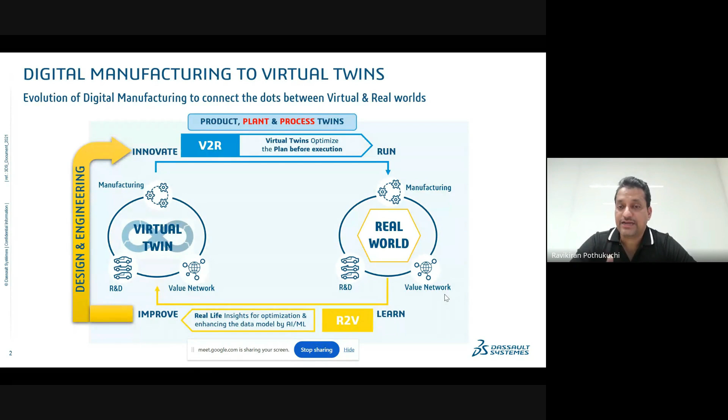Everyone knows it. You create a model, and that model starts learning from what's happening in the real world. That's artificial intelligence, right? You have a model, and that model is understanding from the real life insights, and it is becoming better and better. So this is the manufacturing world, and this closed looping is what we call it as the power of virtual twins enabled artificially intelligent engineering operations or industrial operations.

So in summary, the digital manufacturing has evolved to become artificially intelligent. And how did it become artificially intelligent? For anything to become artificially intelligent or AI ready, you should have a model first. You should have data first. Model is coming from virtual twins. Data is coming from real world operations. That data is plugged into virtual twin, and the virtual twin starts learning from it and starts becoming artificial intelligent. And thereby, what you're doing, you are creating new products, new plants, new processes that are much better than your earlier versions. This is the evolution of digital manufacturing.

And this is the future of digital manufacturing. And AI is not just limited to the software engineers and IT geeks. AI, please be ready. AI is knocking your doors, guys. It's knocking the doors of plants, shop floors, design houses, and all of that. And there is a lot more that I'm sure you're doing a lot of Googling. You'll figure out how AI is.

You can now click off a button or giving a prompt, you can design a car. You don't have to do all these flashy steps. You may wonder that it might be discouraging for a mechanical engineering graduate who is spending four years to design an IC engine. And here somebody is telling me that you just have to put a prompt with some text and some questions, and suddenly it creates an IC engine. Yes, that's going to be reality. And the reality is propelled by virtual twins.

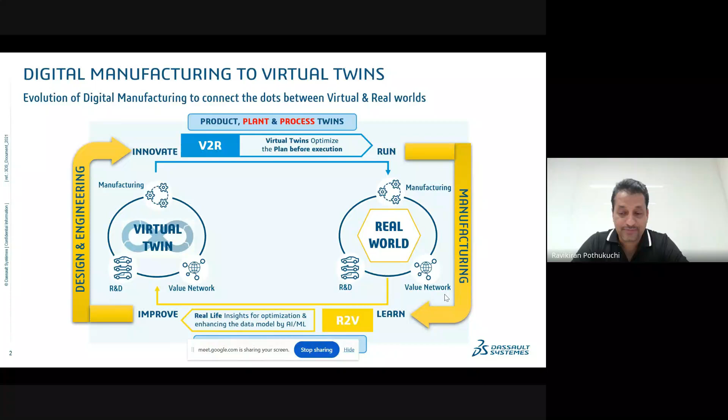And that's why I'm saying it's still future, but there is a lot of research that we are doing at Dassault Systèmes, and there are so many other companies that are investing a lot of money into their research and development to bring out this generative experiences or generative product design and product manufacturing capabilities into the technology. Okay, with that context, I'll having set the context about digital manufacturing and how digital manufacturing is evolving into virtual twins and how virtual twins are becoming the foundation of this AI of industrial operations, right?

I'll pause here so you internalize this message about how digital manufacturing is evolving into AI-driven industrial operations. Now I'll give you examples from both aerospace and shipbuilding industries, as requested. But here is where we may look at some traditional things first, since the future is still getting ready and I'm not entitled to share that yet—it's still confidential IP. I wish I could share that next year when we do the session. I'll share more about generative AI-driven design and AI-driven manufacturing capabilities. Now, coming back to how digital manufacturing is critical, how and why it's enabling these industries, especially the players in them.

Okay, I'll take a quick pause for you to internalize that message, and also a sip of coffee for me.

Now let's come to the aerospace industry. Ten years ago, people just knew there was an aircraft and you fly—nobody had much interest in aircraft except aerospace engineers. But today everybody's interested, for good and bad reasons. The good reason is that flying is always exhilarating; I remember my first journey at 20 years old, being on the clouds, experiencing that journey. It was good. But in the last 10 years there have been so many aircraft accidents, especially the Boeing 737 MAX, and that has garnered interest even from common people.

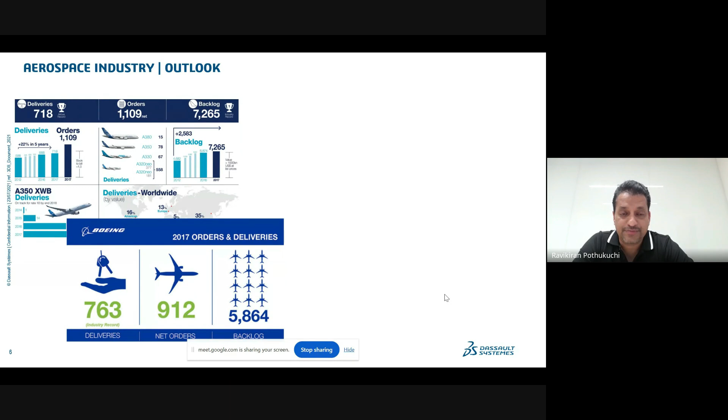And this is where digital manufacturing comes in handy. First, how can I produce more with what I have? That means I have only a few plants—can I produce more and more? If I'm producing 10 aircraft, can I make it 20 aircraft a year from that same line? So to do that, how do I modernize my existing facilities, which is very important because newer equipment brings better efficiencies?

Then the second part: because of these rush deliveries, there were quality issues, as we've seen with Boeing 737 MAX. So it's becoming even more paramount—regulatory demands on aeroplane companies have increased. It's important that non-conformances are reduced, and first-time-right is being looked at very keenly. That means shop floors and factories have to become more and more quality compliant.

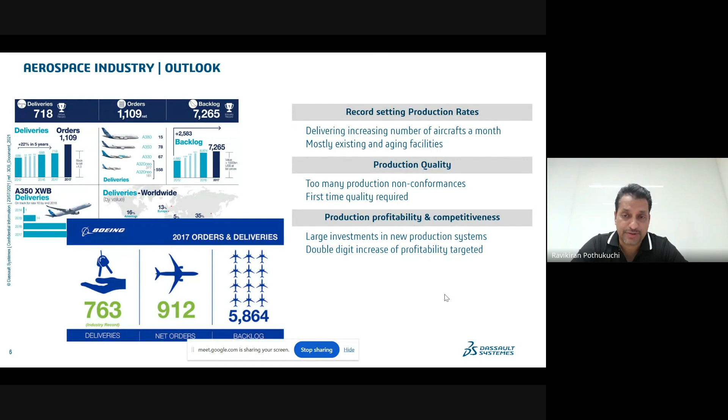And then there's production profitability and competitiveness. There are so many players coming into this space, and there's a lot of competition among them. So when there's competition, profitability reduces. And when profitability reduces, people tend to take shortcuts.

How can you maintain your profitability while being competitive? That means you have to adopt new methods, new materials. If I use a composite instead of regular sheet metal, my fuel efficiency will increase. With maybe one gallon of fuel, today I'm flying 1,000 or 10,000 kilometers, you may fly even more. So how do you bring new materials and new methods of manufacturing so that your operational costs are reduced? This is where profitability comes into picture.

It's not just about what is the cost of making it, it is also important what is the cost of operation. A lot of people tend to ignore that. That is where the competitiveness by introducing new systems, new materials, and new methods of manufacturing from the shop floor context becomes very important. And then the supply chain dependency.

Today, even in India, we have so many companies like Tata Advanced Systems, Tata Aerospace and Defense, Mahindra Aerospace, Godrej, all making components for global aircraft companies. For example, the Boeing 737 empennage is made in Hyderabad, and similarly the Sikorsky helicopter cabin is made in Hyderabad. So what do I mean by this? Although the assembly units are in the US and Europe, these components are distributed across the globe, some manufactured in India, some manufactured elsewhere.

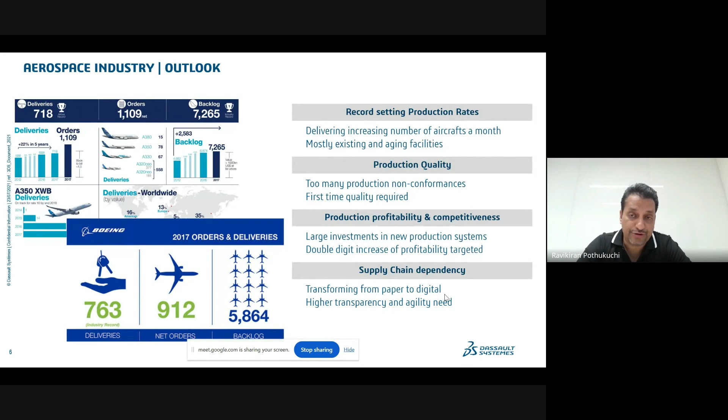Because of these factors, I have given you a business outlook, because it's very important. I know most of you are engineering graduates and you think technically, but it is important to understand why there is a need for certain technology. Every technology is nothing but an application of science, and it exists to address a certain business problem. So the business context is always important. I just spent some time giving you this business context.

So how can they produce more and more with the same capacity? That means they have to produce more per hour. And how can they do it? Can we have a flexible production system? A flexible production system is a production system which can be tweaked based on the demands and the product variants and configurations.

Production quality, as I said, ensuring production quality is paramount in aerospace engineering. There are so many ways and means to track quality during production and assembly. Today, there are devices on the shop floor that can monitor the torque applied while screwing a bolt or a nut, and even those parameters can be captured automatically. There's even auto torque which screws it, and you get the parameter of whether it's within range or not. There are many ways of carrying out assembly, riveting, bolting, and welding activities, automatically captured by these IoT systems to tell you whether they're within range or not.

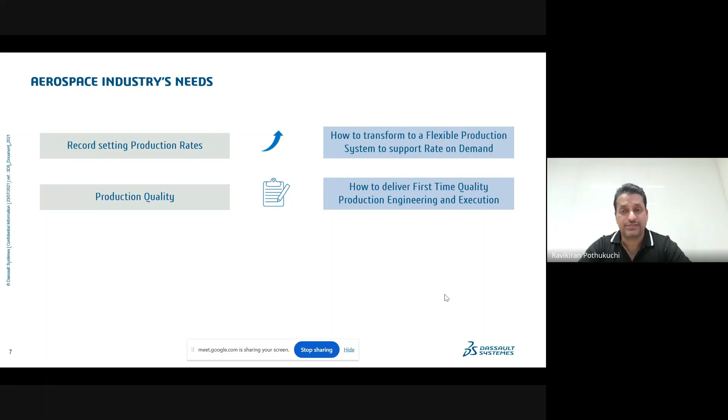That means gone are the days where quality is inspected; quality is built in. That's how manufacturing is evolving. Now people are not waiting for quality conformance, they're waiting for quality assurance. What is the difference? If you check for quality after the job is done, it's quality conformance. If you ensure quality is built in, it's quality assurance. So more and more quality-assured products are emerging, and there are many new methods and industrial equipment that have come handy to enable these aspects.

Profitability and competitiveness, I mentioned this. This is where we talk about new materials. Can I use carbon composites? Can I use glass fiber composites? There are many ways of introducing new materials that can reduce the overall weight of the aircraft, thereby improving operational efficiency and fuel efficiency. Improving fuel efficiency is not just for profitability, but also sustainability, because of the reduction in carbon footprint.

Similarly, in factories, not just aircraft, even factories are big carbon footprint creating entities. Today there is a lot of emphasis by enterprises in ensuring that their factories are sustainability regulatory compliant, meaning the energy consumption has to be optimized.

What kind of energy sources are they using? Is it renewable energy or thermal non-renewable energy sources? What kind of water resources are they using? Any other natural resources they're using, raw materials like metals that they are consuming.

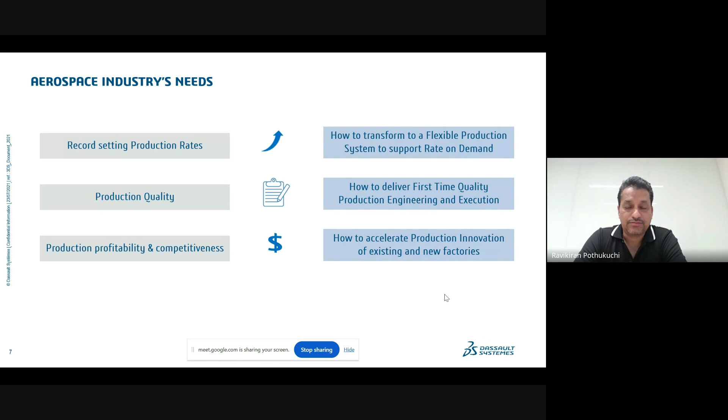So there is a lot of focus on how less can we use to build the same product, how optimally can we deliver the same product by minimizing the wastage. That's also adding to the profitability and the sustainability dimension.

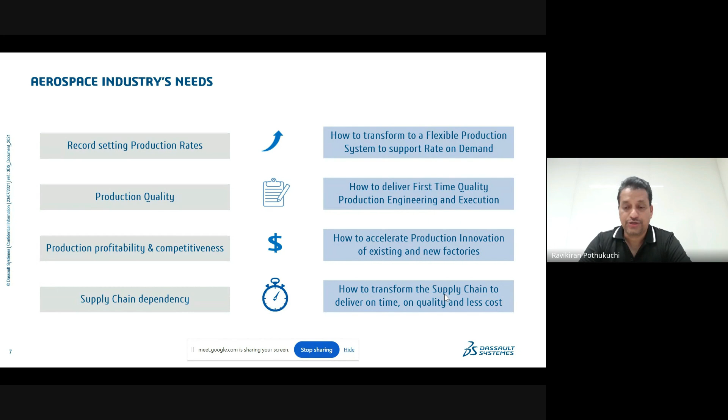And supply chain dependency, how to transform supply chain. There are so many disruptions, as I said. COVID pandemic was a disruption, the entire supply chains got halted, and we could not have done much about it. But even in the case of these pandemics, or any geopolitical tensions, how do you still continue to operate your supply chain so that you are not missing out on your deliveries? These are the industry's needs.

And to meet these needs, as part of our manufacturing, what you see here in the slide is, on the left, what you see as winning concept, program excellence. These are all the various activities of aircraft manufacturing: system requirements, manufacturing requirements, structure creation, lofting, concept BOM, product evolution, scheduling, change management, manufacturing bill of material, assembly instructions. So what are all the various steps or phase gates of aircraft manufacturing?

In today's context, because we are focusing on digital manufacturing, what I'm going to emphasize is how you are going to address these four components: the production rates, the profitability, the supply chain network orchestration, and then the final one is the entire scheduling and activities.

So you see here, let me bring a cursor. This is where you get your demand - this is the entire S&OP planning or the supply chain planning. You have a demand, and to meet the demand, you have certain capacity. How do you balance your demand and supply? That means you have to outsource a lot of activities. It's more of a business, kind of an industrial engineering and industrial management topic, maybe not for the core engineering folks.

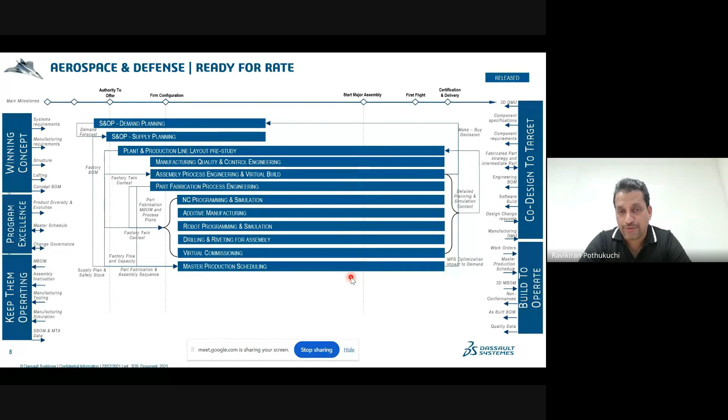What do we mean by that? By putting these technological components, by carrying out these studies before you take the aircraft for manufacturing in the virtual world, you can improve your delivery rates. That means you are ready for the production rates that the organization is expecting.

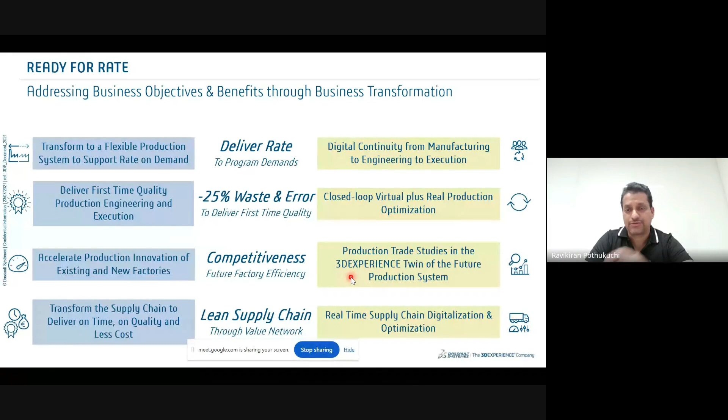And by doing this, these are the benefits - delivery rates. I'll not get into this, these are more of business outcome statements. But what I'll do is cover these 4 key aspects: deliver on rate, optimize your part fabrication, increase competitiveness, and lean supply chain. Each of them have some detailed techniques.

I don't know how long these videos are, but let's look at what happens in part fabrication process engineering. I'll play this video - let me know if you can hear the audio.

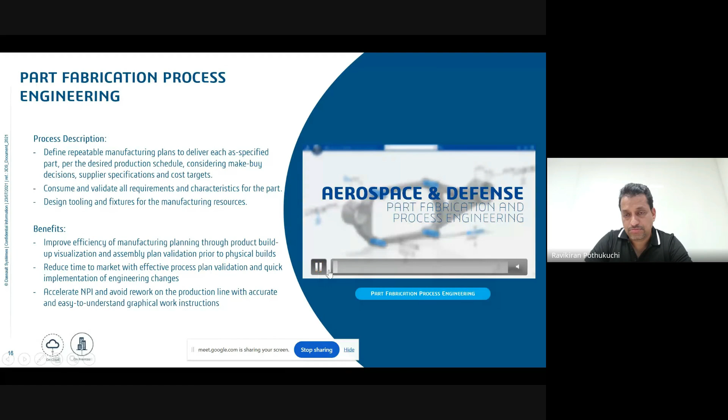Visualization and documentation of fabrication. Can you hear the audio? Yes sir. Okay, strategies for elementary parts.

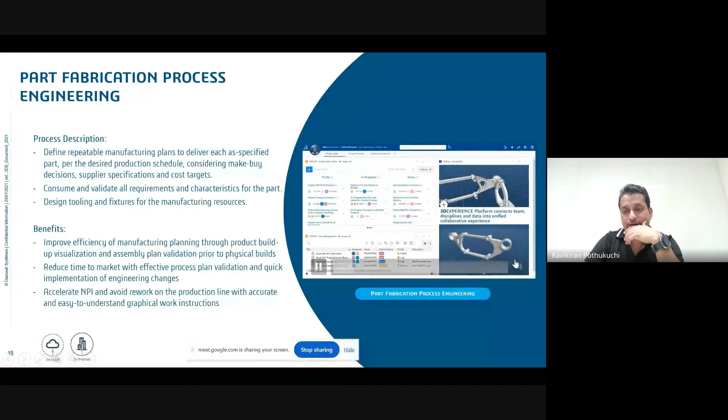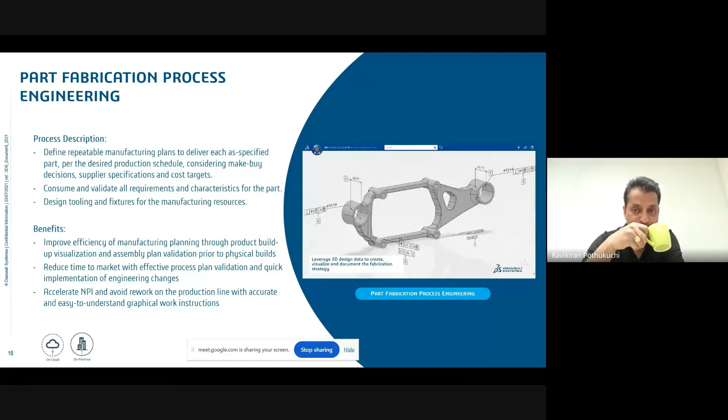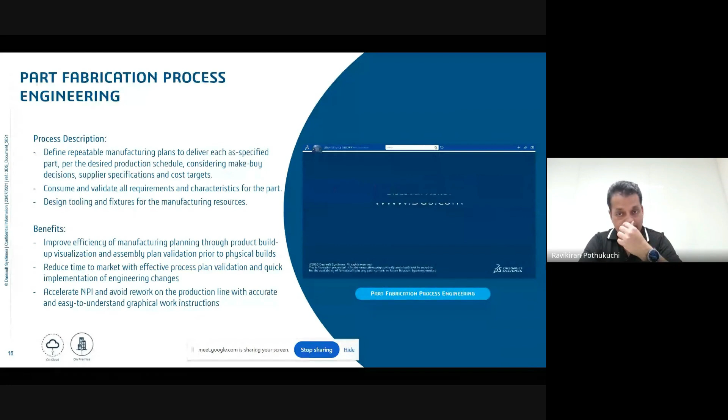By leveraging the 3D Experience platform and connecting the dots between engineering and manufacturing, users can define 3D model-based manufacturing BOMs and manufacturing routings with full accountability in a unified user experience. The seamless collaboration between disciplines in the platform ensures that all design and fabrication requirements are considered and met. Validate the fabrication processes for existing and new parts, leveraging their full 3D definition to secure first-time quality and desired rate. Visualize, trace, and consume all engineering and manufacturing requirements in an immersive 3D environment to make sure nothing is forgotten. Leverage the 3D Experience twin of shop floor assets and tools to build clear and concise 3D manufacturing work instructions for operators.

This allows a product program to utilize 3D work instructions to shorten the learning curve for new workers. I think it's more or less self-explanatory, so I'll not spend much time on it.

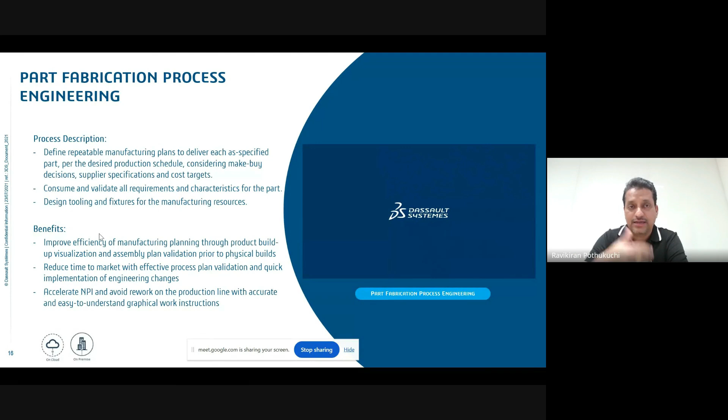So what it is showing is, when you're carrying out a part fabrication activity, how you can ensure that from the knowledge you're building over a period of time, you can leverage that knowledge readily for creating a new part. And while doing so, how you can transfer the part fabrication work instructions to your shop floor so that they can follow those instructions and ensure the right activities are carried out with the right tolerances. That is part fabrication - one of the steps.

From an aircraft part fabrication standpoint, now we will look at assembly process engineering and virtual build. I did mention earlier that assembly, when you do the virtual build, it is virtual because you're not building it in physical space. By doing the virtual build, you are saving a lot of money. And how do you do that? Because there is lesser wastage - you're not taking it into production unless you validate the virtual build.

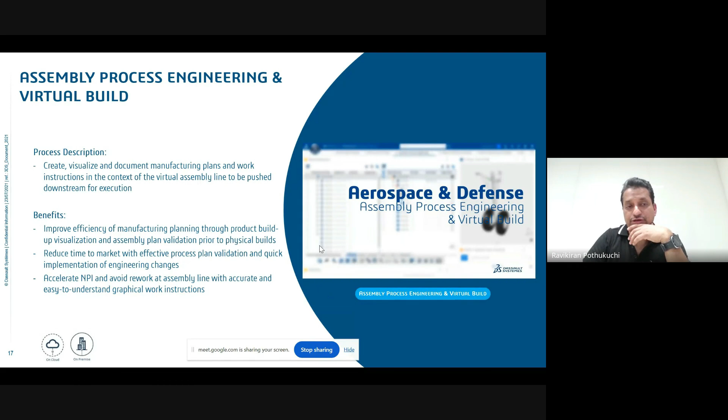This is what we call digital mockup, which you're very well aware of - it's also called virtual build. How this can be carried out and what are the benefits of it is what you will get to know from this video.

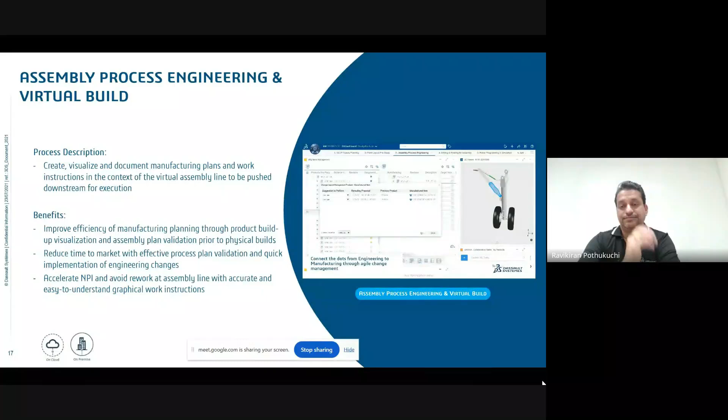Assembly process engineering and virtual build focuses on manufacturing engineering for assembly procedures. By leveraging the 3D experience and connecting the dots between engineering and manufacturing, users can define 3D model-based manufacturing BOMs and manufacturing routings in configuration with full accountability. The seamless collaboration between disciplines in the platform enables agile change propagation between design and manufacturing with full traceability. The 3D Experience platform navigates through the links between engineering and manufacturing data, allowing users to efficiently build lean working sessions with only the necessary data.

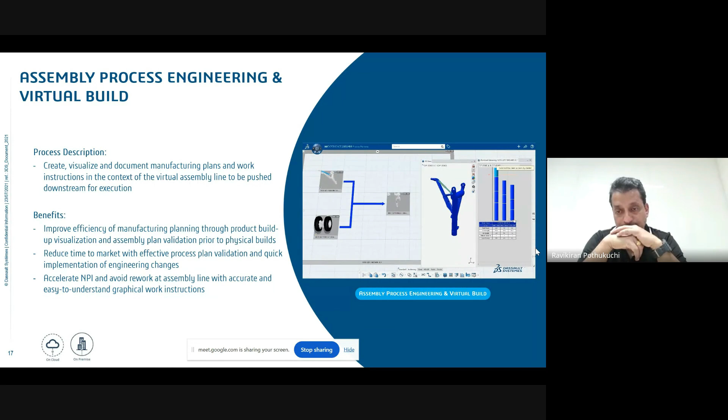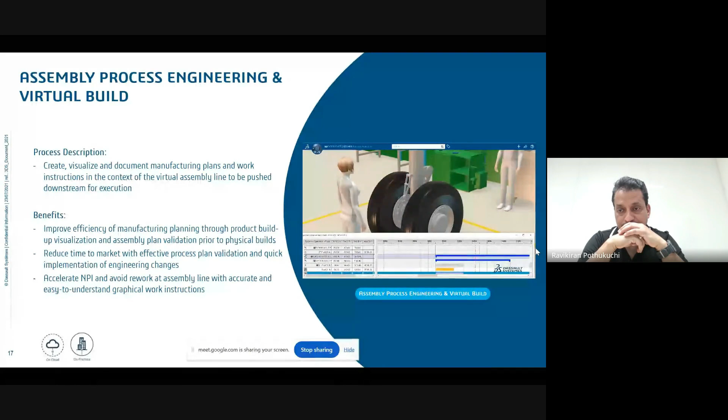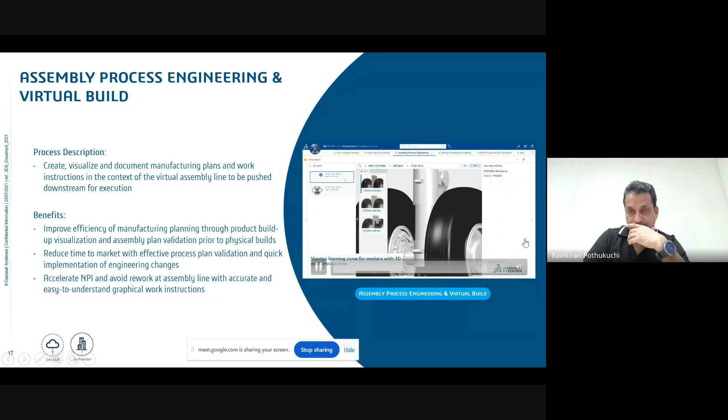Accelerate the introduction of new product lines and variants by leveraging workload balancing capabilities built into the 3D-based process planning applications. Use the 3D process plans to simulate and virtually validate innovative assembly procedures, ensuring first-time quality for existing and new products. Seamlessly generate 3D manufacturing work instructions for the assembly processes and keep them up to date with respect to incoming engineering changes and updates. Publish the 3D work instructions for web view, visualizing them as any shop floor operator would, and ensure they shorten the learning curve for assembly workers handling complex aerospace products.

Okay, here I would add on top of this context - we call this the PPR context: Product, Process, Resource. This is a very interesting topic. Any manufacturer is in the business of building a product, and to produce a product, he will follow a process. And to execute that process, he would need certain resources - human resources, machines, robots, whatever it is. So how do you bring these three pieces together? Product, process, and resources, contextualizing all these three elements.

Sometimes what do I mean by this? Sometimes the virtual build of the product looks okay - you may see it's fantastic, it's good. But only when you bring in the resource, the robotic arm may not be able to reach that particular area. So when you're just assembling the virtual build or doing a digital mockup, the components come together easily.

But when I bring the context of resource, which is a robot or a human who has to put a hand and weld or rivet, he doesn't have access. So what looked to be a right assembly has suddenly become not so right, because it is not giving access to the robotic arm or a human arm.

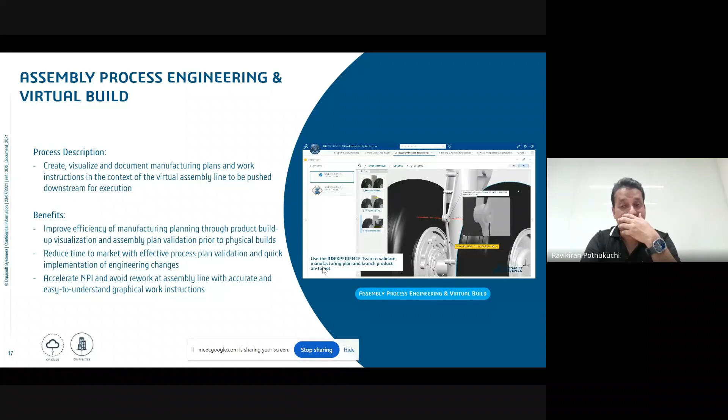So that's why it's important that you carry out the virtual build or digital mockup by putting product, which is your end goal, process, which is your operation sequence, and resources, which are used to carry out and execute this particular activity. All these three have to come together, and that is when you are carrying out a real virtual build. And that's what is captured in this video.

Okay, and by doing this, by carrying out these activities in the virtual world, I strongly urge... I don't know, Dr. Srihari, whether you agree with me.

The importance of knowing technology is how it is affecting, what are the outcomes it is delivering. It is not just technology for the sake of technology. So I'm bringing up these topics of what is it you achieve.

You achieve gain in efficiency because you are able to plan it better. You are improving your production rates. You are reducing your errors. When you reduce your errors, you're reducing your rework. When you're reducing your rework, you're reducing your scrap, because rework means there is scrap. You're reducing your scrap.

When you're reducing your scrap, trust me, you are becoming sustainable, because whatever material you're using to build is nothing but a metal that is mined from the earth. So by not doing rework, by not scrapping out, you are only saving the natural resources. And when I say natural resources, not just energy and water, it is also the metals that we are mining from the earth.

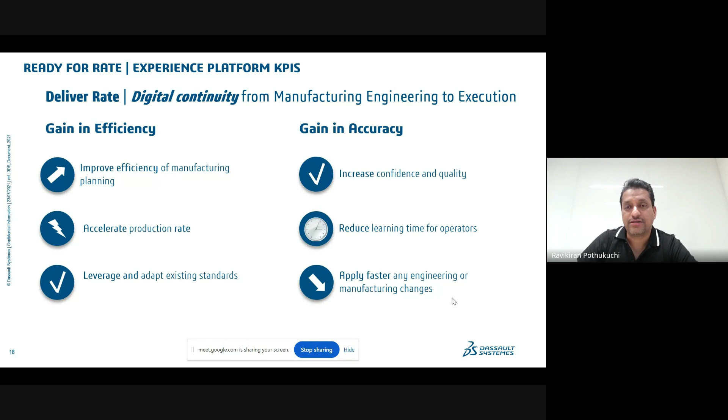Right, so these are all the benefits that you get out of these technologies. I'll not get into what are the benefits that some other customers have gotten from this. Then we'll get into the optimization platform. So it is more about the current thing.

What you have seen is part fabrication and assembly process engineering. Then we go a little granular. In part fabrication, you do NC programming, you do NC simulation, the tool path validation simulation.

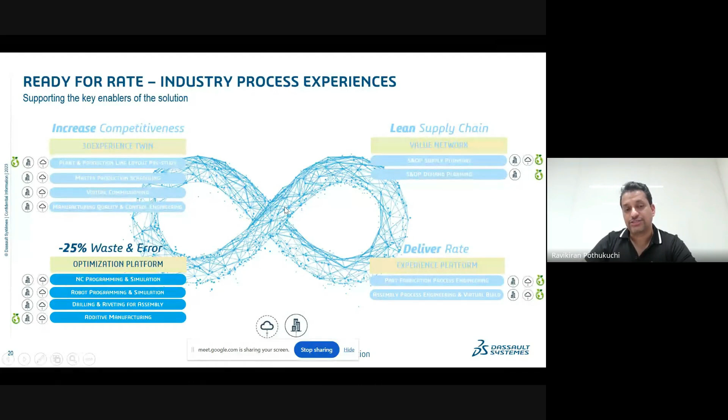Similarly, robotic programming, when you're using a robot for assembling two pieces together, even before the real shop floor robot operates, you want to ensure that the robot is having the right programming with the right degrees of freedom and all the movements, so that it is putting the parts together in the right fashion. So there are technologies that enable you to carry this out in the virtual world, and that's what we'll see now.

First, we'll begin with NC programming and simulation.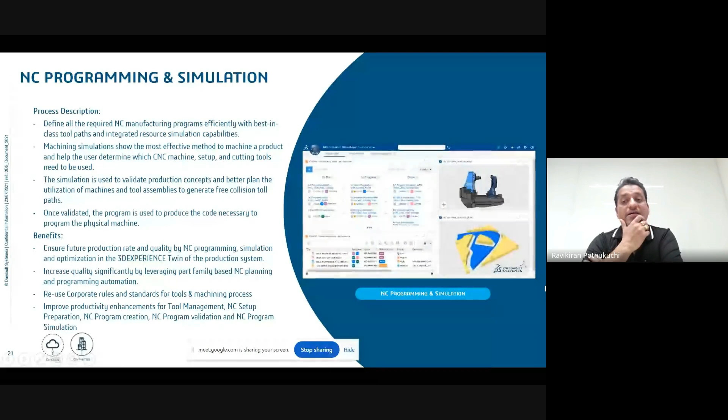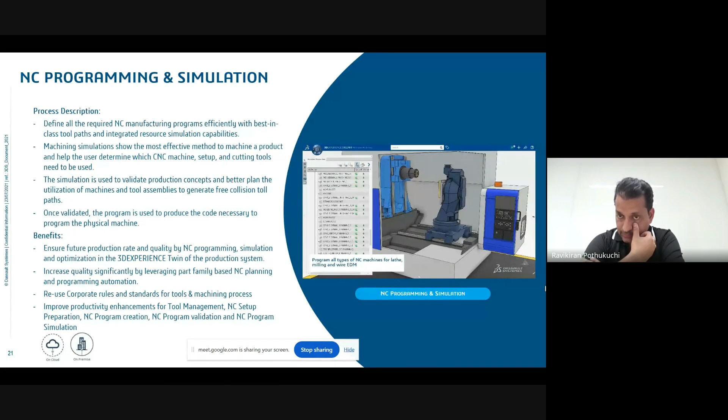Programming and simulation focuses on the definition of all required NC manufacturing programs with integrated simulation capabilities and best-in-class toolpaths. By leveraging the 3D Experience platform and connecting the dots between engineering and manufacturing, users can ensure future production rates and quality through simulation and optimization with a 3D Experience twin of their production systems to decrease material usage and changeover times.

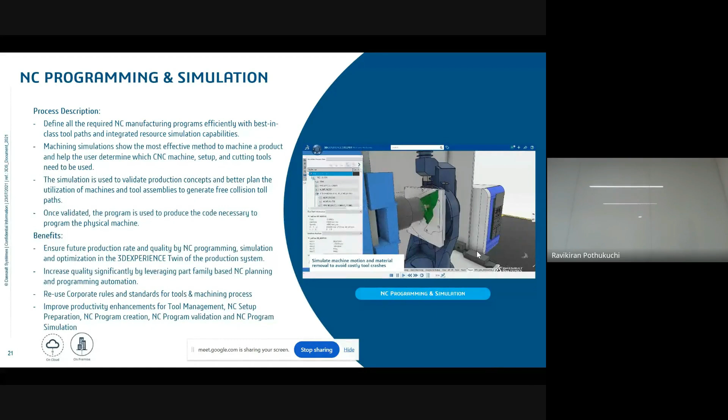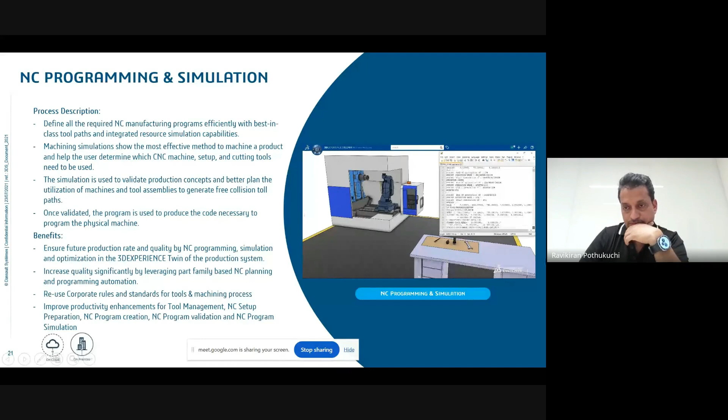Program and machine context for increased quality, and reuse company-wide cutting tool catalogs to avoid data duplication and decrease costs. Use a unified collaborative platform to program the whole set of NC machines present in the shop floor for lathe, milling, and wire EDM, and leverage built-in simulation capabilities to identify potential costly manufacturing issues. Validate programs and export ready-to-use machine code in standard formats to support machine execution on the shop floor.

Yeah, I think this video is very highly self-explanatory. So when you are doing the NC programming for any machining activity, you have a tool bit and you have to define its program. You want to simulate its path first before you execute this in real time. So this NC programming and simulation capability will offer you to do this in the virtual world before you deploy it in the real world.

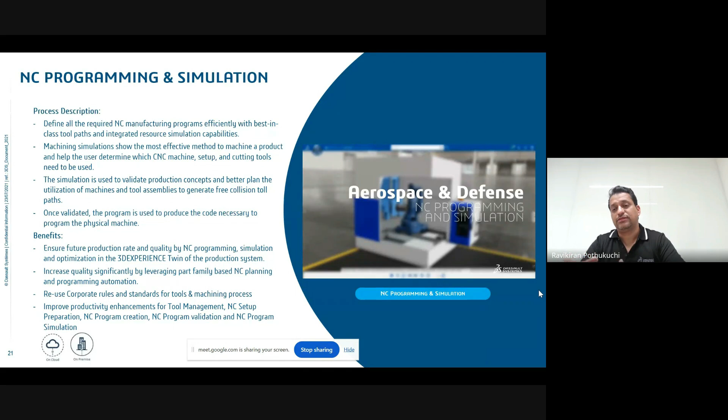So what you can do is take this program and feed it into your CNC machine. And those machines, there are so many coming from Fanuc, Kuka, and Siemens - so many machine equipment vendors. They take this program directly, and the machining tool paths automatically adhere to the program that you have already validated. Okay, similarly, it is a similar logic extension to robotic programming.

I'll just also play this video.

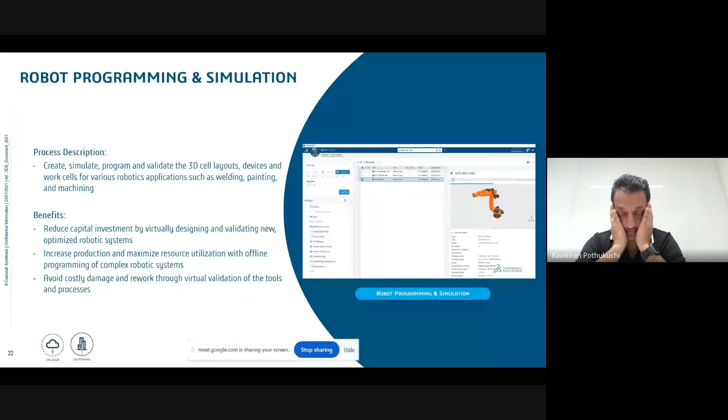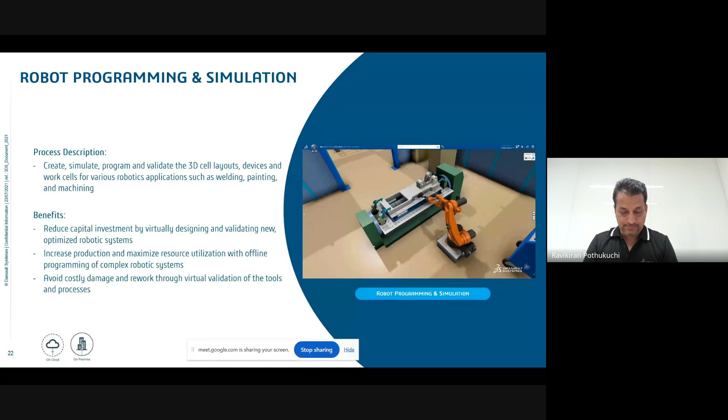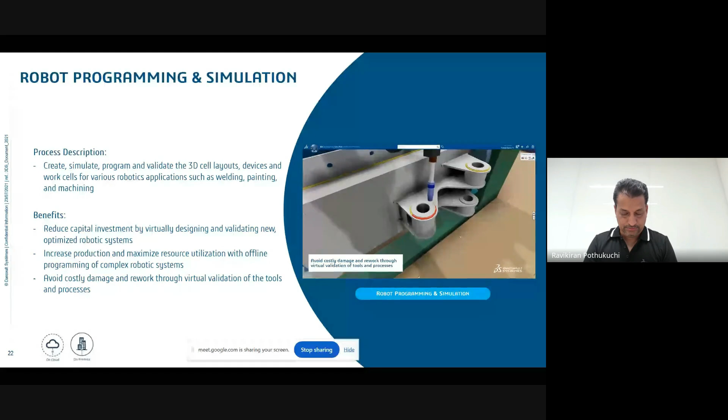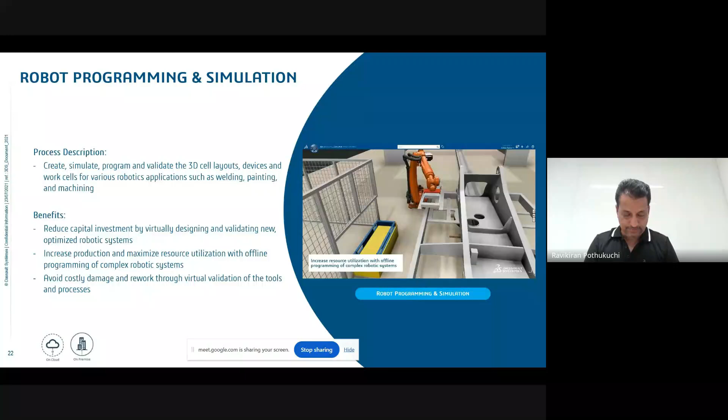Robot programming and simulation focuses on the creation, simulation, programming, and validation of 3D robotic cell layouts, devices, and work cells for diverse aerospace robotic applications. By leveraging the 3D Experience platform containing thousands of robot models from multiple manufacturers, you can design the most efficient complex production system. Use the 3D Experience twin of your manufacturing facilities to virtually optimize robotic processes and greatly increase production rates. Detect any potential manufacturing issues by virtually validating tools and processes to save production costs and increase overall quality. Simulate the behavior of complex, automated production lines with multiple robots to increase and optimize resource utilization through offline programming. Choose the best trade-off for your manufacturing studies.

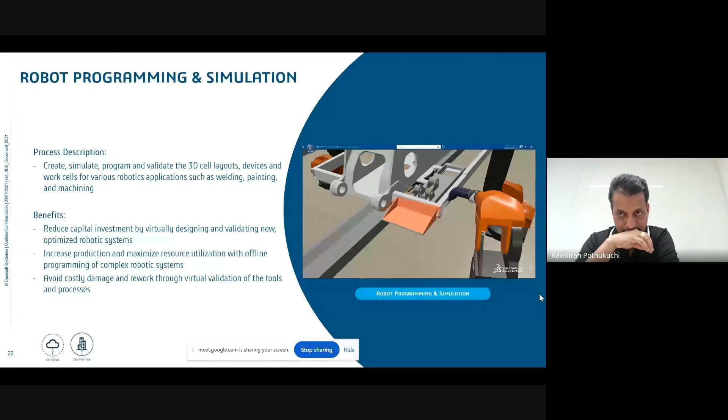Intuitively program diverse robots by easily creating and managing ready-to-download robot vendor-specific programs. Accelerate the creation of the 3D Experience twin for factory of the future or existing facilities using a point cloud solution and the resource catalogs available in the platform. By leveraging the 3D Experience platform, users can seamlessly collaborate engineering changes into the programming processes for quick updates.

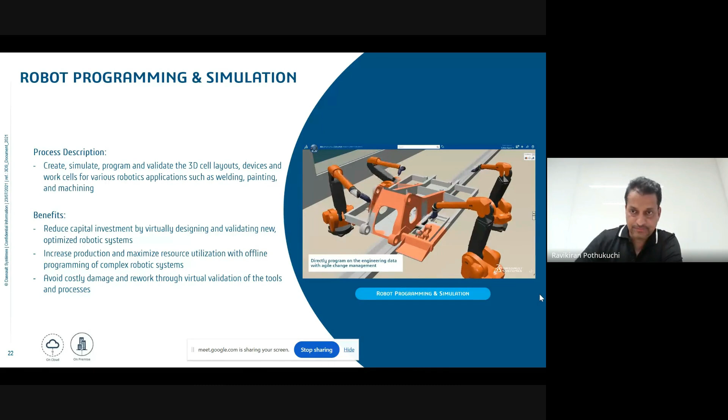Okay, and again, we will not obviously go through all these videos. We'll be short of time. I have a hard stop at 8:40. Shri, this is still 9 p.m.?

Is it this particular... Dr. Shri? Yes, Ravi. Yeah, it's 8:20 here. The time is still 9 p.m., right? We have time till 9 p.m. Yes, yes, okay? Okay, I'll try my best to be here till 9 p.m. I have a hard stop as I told you, but I'll see what best I can do.

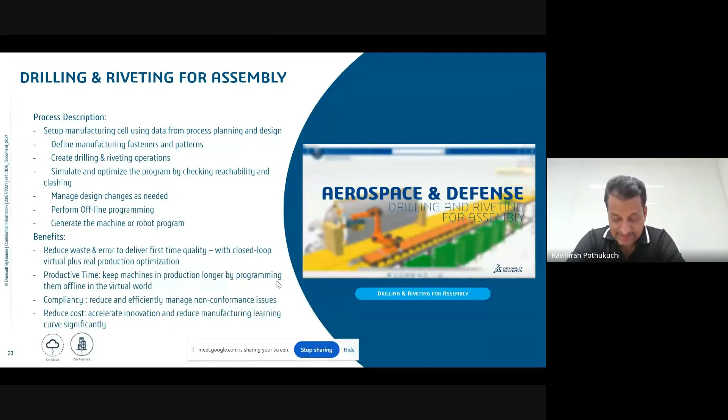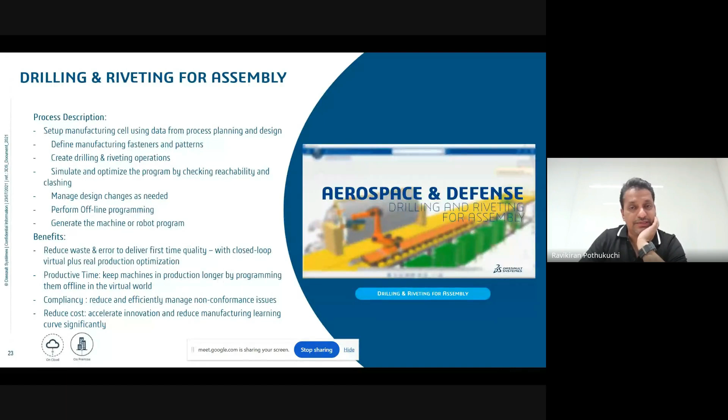Okay, similarly, robotics is used for various activities. It could be painting, it could be riveting, it could be for assembly activity. So I'll not repeat this particular video because it will have similar activity.

But this is an interesting aspect. Aerospace industry is slowly but certainly recognizing additive manufacturing, also called 3D printing, instead of the traditional subtractive manufacturing. While certification and regulatory agencies are not certifying these parts for key components or load-bearing components, at least for internal components, they are approving the usage of additive manufacturing components. So, while machining and various other activities involve removal of material, that's what you do. Typical manufacturing is about taking a stock and you remove, you modify the shape of it, and all of that. That's how we do it.

Additive manufacturing is about creating, putting layers of material and creating, like printing it from scratch. While doing so, the way you hold the part matters. You can create the part in a vertical fashion, horizontal fashion, the angle in which, the orientation in which you keep it, and then the deposition of material will create certain brittleness, certain defects into the part. So this additive manufacturing tool tells you what is the best way of creating or depositing material, and what is the best orientation of the part, so that the defects into the part are minimized or reduced.

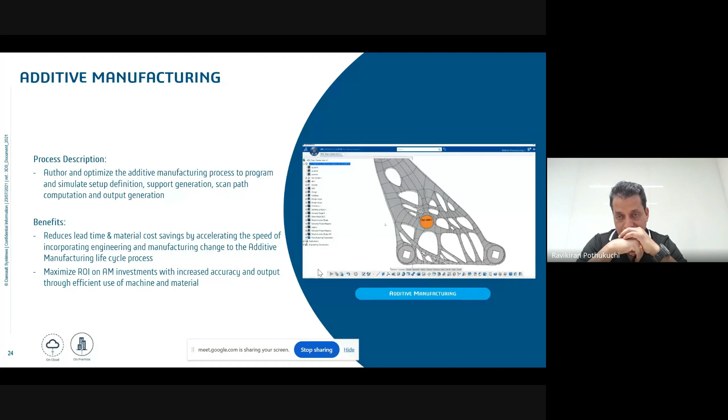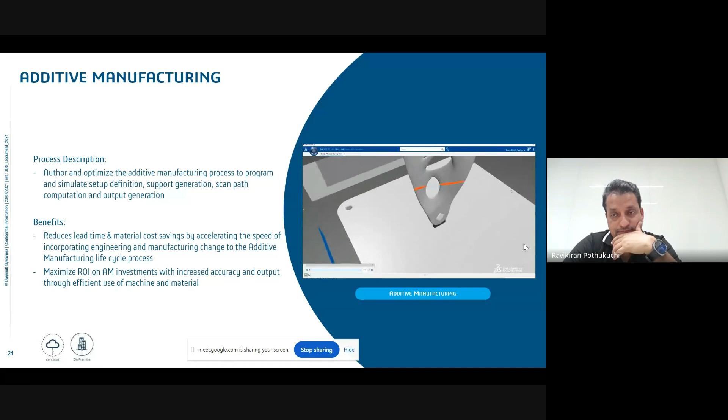Manufacturing focuses on leveraging the digital thread provided by the 3D Experience platform to author and optimize additive manufacturing processes, ensuring first-time quality. This 3D Experience environment connects design, manufacturing, and simulation to prepare design parts for 3D printing by automatically generating optimal supports, machine-specific scan paths, and produces ready-to-use outputs. Accelerate the adoption of new technologies with shorter lead times, reduced material costs, and a maximized return on investment. Use the virtual twin experience of actual shop floor equipment to accelerate process planning of additive manufactured parts that are produced with different technologies, such as powder bed or material deposition.

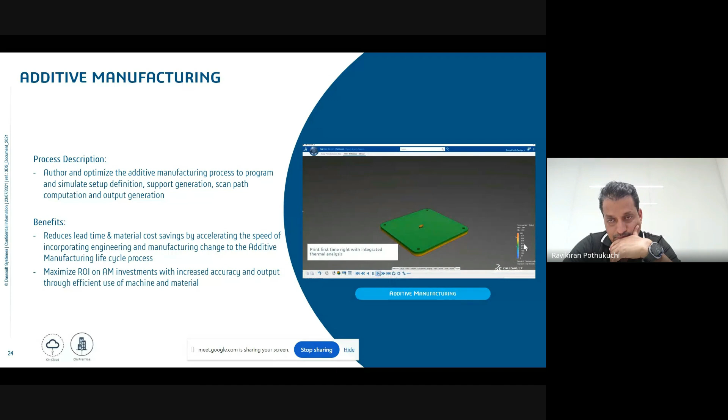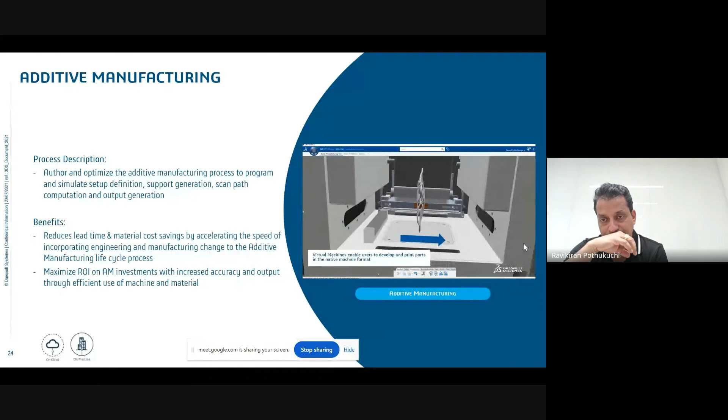It can also be used to efficiently generate programs in native format using machine-specific parameters. Thanks to a seamless integration between manufacturing and multi-physics simulations, part distortions can be predicted, as well as residual stresses and as-built material behavior defined by simulating the virtual print process. Easily export validated programs to the...

So these are all the granular activities. We spoke about part fabrication and assembly. Within part fabrication, you can use NC machining, you can use additive manufacturing, and within assembly, you can use robotic assembly, and then there are robotic offline programming, simulation, and carrying out actual assembly activities. This is what we have covered as part of the two levers. And what it helps, probably I'll share the slide deck with your team so that you can spend some time on it as part of your study.

Once we have done this, so far what we have looked at is how I can validate my process.

Whether it is fabrication process or assembly process, you're only validating it, you're only making it perfect in the virtual world.

But then there is another thing which I said is plant. How do you ensure that whatever plant or factory you have, it has the best and optimal layout in terms of material flow and information flow? And then what kind of scheduling, because there is always material flow—one machine operates and then throws that particular equipment part to another machine. So there should not be any waiting period, no case where material is waiting for the machine or machine is waiting for the material. This can be achieved with the right scheduling.

And there is another interesting thing coming up—so many new factories coming up in India, not just for aerospace, but renewable energies. There are so many plants coming up for battery manufacturing in India. Reliance is investing heavily, Adani is investing heavily, and so is solar, wind.

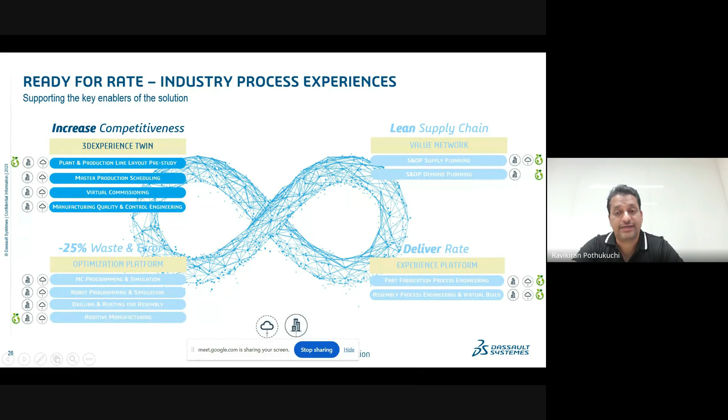I'll take you through all these things. This is what we have covered—the other two pieces about how you prepare your manufacturing process and validate it in the virtual world. This particular piece is about how you prepare your plant itself before you start operating out of it. So let me play this, which talks about plant layout studies.

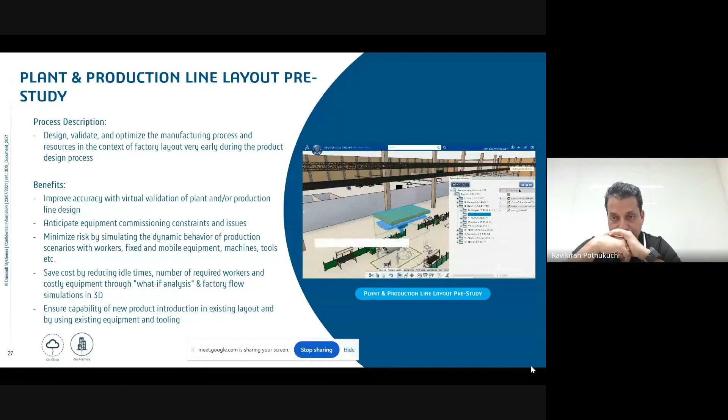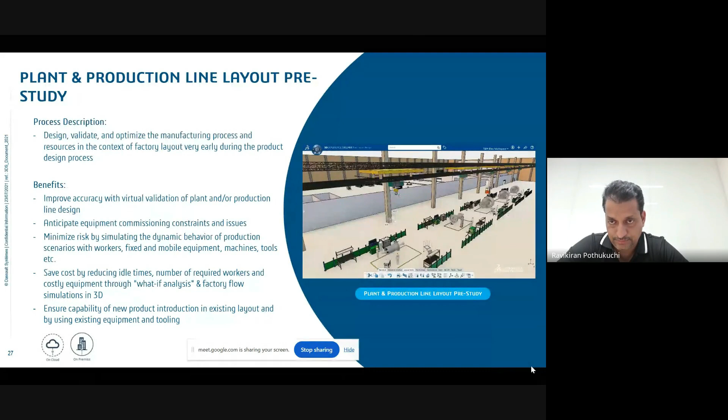Design, simulation, validation, and optimization of factory layouts early in the design process for new industrial assets or to upgrade existing ones. Leverage the 3D Experience platform between product design, manufacturing, and industrial engineering to anticipate and resolve any potential production layout issues. Build 3D Experience twins for existing or future facilities using your point cloud and an extensive industrial asset resources catalog natively available on the platform to virtually validate designs. Simulate the behavior of the envisioned factory layouts with respect to preliminary manufacturing processes to validate the production line's robustness against multiple what-if scenarios. Through these simulations, identify cost-saving points and reduce unnecessary waste. Thanks to the integrated manufacturing and factory flow simulations, you can estimate cycle times, monitor resource utilization and availability, and identify potential shop floor bottlenecks to secure new product introduction in existing or newly designed production facilities. This will allow users to really use the 3D Experience twin to validate and optimize resource positioning and use.

This factory flow simulation is based on discrete event simulation technique, because predominantly most of the activities that happen in the shop floor are discrete events. How you model these discrete events and carry out this discrete event simulation—a very well-known mathematical simulation technique—using these concepts, we can carry out a factory flow simulation. How is the flow? Which particular station is a bottleneck? How do I solve that bottleneck? If by solving that bottleneck, am I creating another bottleneck in another station? So all of these things can be validated.

So before you set up your factory, you take the layout and you build the plant. There are a lot of catalogs available with all these standard equipments—could be conveyors, could be machines, robots. Everything is already available as catalogs in the technology. You can use those catalogs to quickly build your factory in 3D. Then it's not just a dummy 3D model—then you build the behavior.

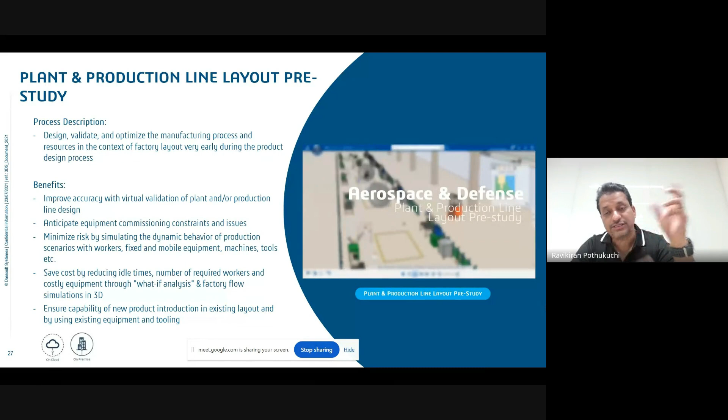Take Tata, for example - they were producing Nexon as a variant. Now they have to produce Curvv. If they have to phase out Nexon, they may use the same line, reconfigure it a bit, and start producing the new one. So every new car variant doesn't necessarily mean you have to build a new factory. This factory flow simulation and plant layout technology can be used not just for new factories, but also to reconfigure existing factories for new product introduction.

Master production scheduling - I'll skip this in the interest of time. It's an interesting topic because it's an intersection of engineering topics and industrial management, so it may interest some of your students. Let me play this video, it's just 3 minutes.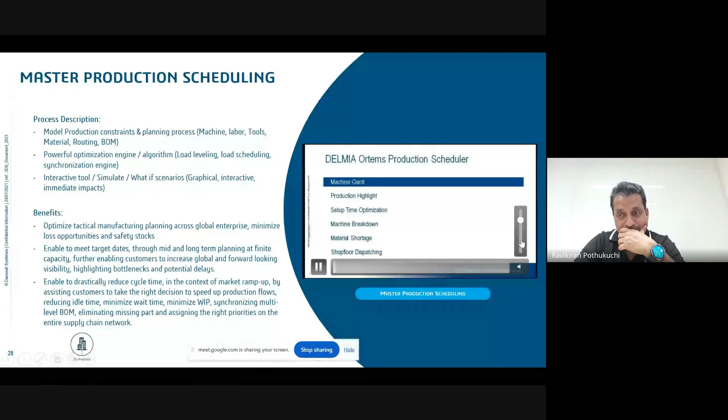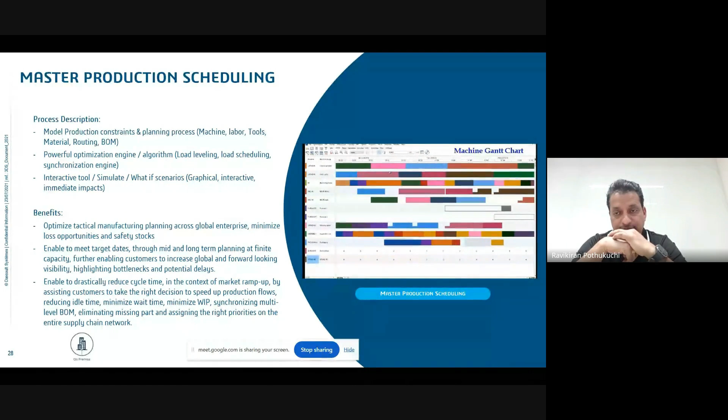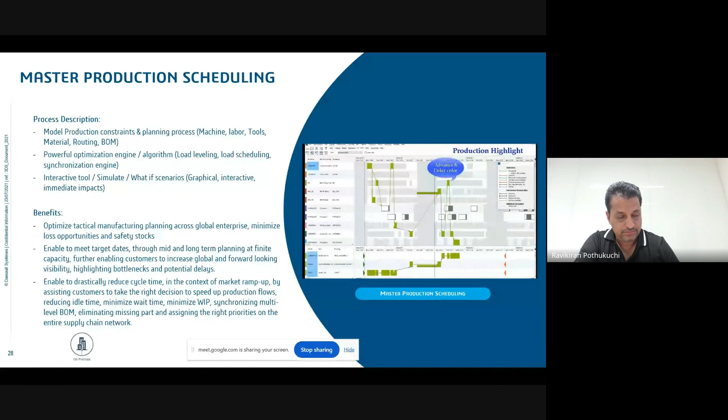Capabilities of the DELMIA Ortems Production Scheduler for work orders with details are provided for review. By hovering, we are presented with additional data for work orders with the ability to add interactive operational information. Expanding the time horizon from weeks to days to shifts will reveal details on the Gantt. The production highlight screens represent production by machine and work order. It shows the relationship of work orders for a particular machine. By splitting the window, you see all the work assigned to a machine with various links. We also see indicators of the work order scheduled start and end dates shown by red and green arrows. The display colors indicate advanced and delayed operations machines. Setup time optimization gives visibility and optimization of setup time.

Sir, is this software customized or commercial software that industries are using? No, this is industrialized software - most of our customers are already using it. It is commercially available off the shelf, but we also offer it in a limited version to academia.

Does it directly link with the production line? No, it doesn't directly link with it, so you have to do a bit of configuration. What you have to do is, in this case, you have the work orders - work orders are nothing but job orders. Job orders are coming typically from the plant's ERP system.

ERP system is where you create your work orders. That work order has to be executed, carry out certain steps, and go through which machine has to be scheduled for this particular work order. So you get multiple work orders - you have to carry out multiple production orders. How you utilize your capacity and distribute your machines and capacities to different work orders is the scheduling activity.

So it is not done automatically - someone has to do it. Is this package coming with the ERP system or is it separate software? No, the ERP system is about creating your transactions. This is only scheduling software - once you get the work order...

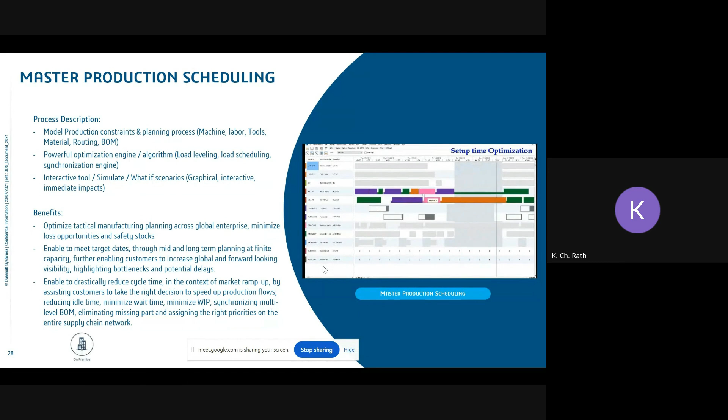Then after that we have to interlink this. Exactly. Okay sir, thank you. Thank you sir, you're welcome.

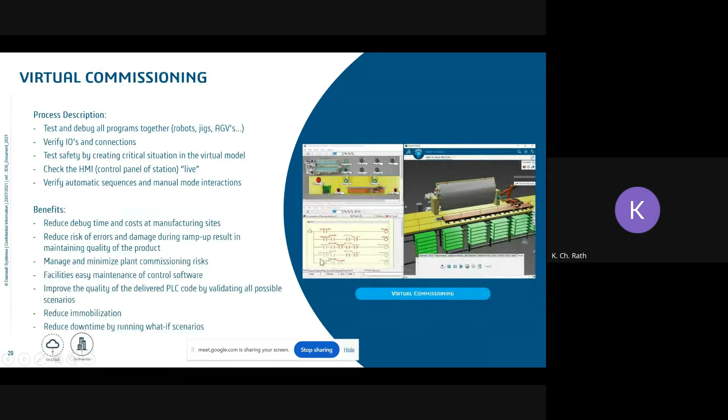So please don't mind if I'm running fast - I'll go to the virtual commissioning. This is a very interesting topic, and this is what I was talking about earlier. Are there any free software for student version or learning purpose?

We do have not free software, but a very highly subsidized software for academia. Obviously, it comes with its own limitations in terms of the modeling capabilities. You cannot model a plant, you can only model an equipment and all of that.

So we are already interacting, we work very closely with all the IITs. Even Aditya Institute has a part of our technology which they use in their course curriculum. So we'll be very happy if you are interested in any of these things. We have a team which is interacting with academia, and trust me, we put a lot of emphasis in creating the workforce of the future. So we invest our time and efforts, and even the software is heavily subsidized for institutions.

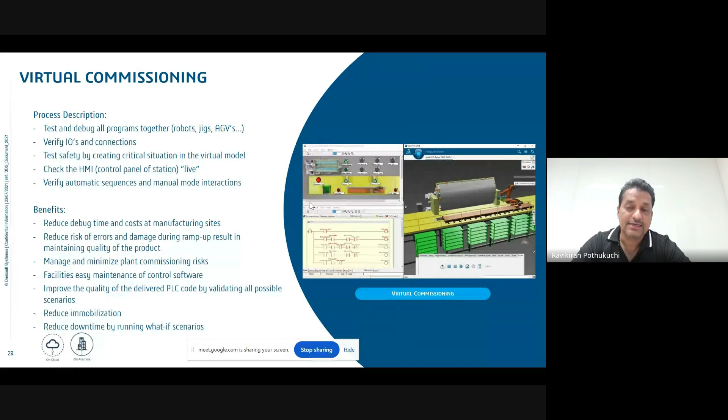So what we do is we create a virtual model of your entire factory. We put this control logic, we bring these two together, the behavior and the body, and then run it as if the plant is running in real time, but not on the floor, but in your computer, and then see what has to be corrected. And only then, once everything is right, then you sign it off and take it into the actual commissioning activity. That is what is virtual commissioning.

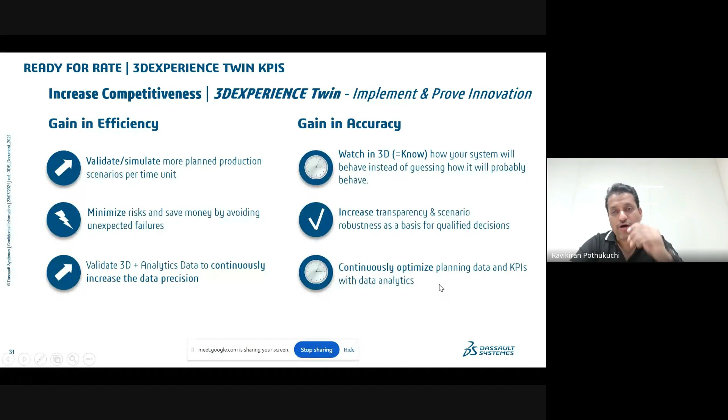Quality control and all of that, okay, so I'll just pause here. This is what I have, another 10 minutes. I'll cover shipbuilding quickly. Aerospace and shipbuilding industries have very similar activities, so since I covered aerospace industry at that length, I don't have to spend so much time on shipbuilding.

The only difference between shipbuilding and aerospace is aerospace is sheet metal, light metal, whereas shipbuilding is a very heavy metal, which is steel of thickness 10 mm and sometimes even thicker plates.

Okay, so what we covered in digital manufacturing: you first model your plant, ensure that your plant can be modeled, right layouts, right flows, factory flow simulations, ensure that you have the right factory flows, right layout, only then you take it. But even before you do it, you also want to commission your line. So virtually commission your line by putting the behavior on top of the body, validate it, and then commission your plant. That's a factory and factory twin, how you are doing the factory.

Once you have the right factory, then you have to ensure you have the right process of manufacturing. To do that, you carry out NC machining and simulation, robotic simulation, part fabrication process planning, assembly process planning. All of this is to validate your build and your fabrication activities in the virtual world before you put the process as a repeatable activity in the shop floor. So you are validating your plant and factory, you're validating your process. Only when you are certain of these two aspects, you're going into the shop floor.

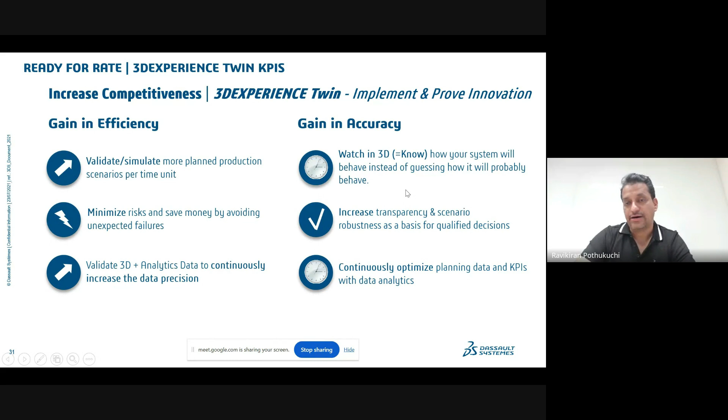And when you do this, as I said, there is no undo in the real world. So better you do all those undos in the virtual world, get perfect at it, and then start producing. You will save a lot of time, a lot of rework, a lot of material, better quality, all of that. Okay, that's the idea of digital manufacturing in the aerospace industry. As far as shipbuilding is concerned, a very similar concept.

Here, the most important aspect is how do you establish the digital continuity from your engineering world to the manufacturing world. So again, what to build? What to build is nothing but your work instructions or production documents.

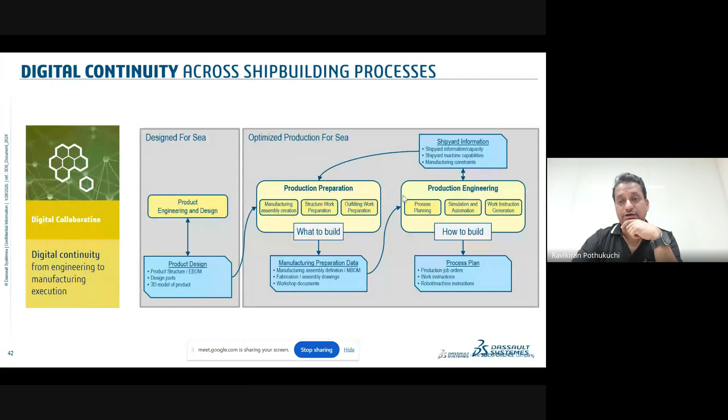Shipbuilding industry is a little different from aerospace industry. It is a labor-intensive industry, meaning the people on the shop floor are not that educated. They are contractual labor, they cannot understand the 3D models and hi-fi software. All they understand is 2D drawing sheets. So you have to transmit this information from a 3D model to a 2D drawing. So that's what to build and how to build. You carry these two things out and translate that into easily comprehensible 2D drawings, which is what the workforce or the contractual labor in the shipbuilding industry understands and executes.

Again, similar steps. How do you prepare your data? How do you prepare your process plan? How do you prepare your plant layouts?

Here also you can use plant layout scheduling. Shipbuilding industry is, in a sense, not very organized in terms of layouts. If you go to a shipyard, you see plates here and there.

The best industry as far as manufacturing is concerned is automotive. High-tech, specifically high-tech industry, is the most automated industry. Then comes automotive, then comes aerospace. Shipbuilding falls way below in terms of how they organize their manufacturing process.

The reason is the ships are large, the parts are larger, the space is smaller. So when you go into a shipyard, the plates are always everywhere, and there are big cranes coming and putting these pieces together. It's a very labor-intensive activity.

The idea here is just creating dedicated spaces to put the material, whether it is raw material arriving at the gate, or a semi-fabricated panel, or an assembly, or a bracket, or a deck, whatever that particular panel is - where do you place them so that you can easily assemble them and erect the ship together? So it's a different ball game.

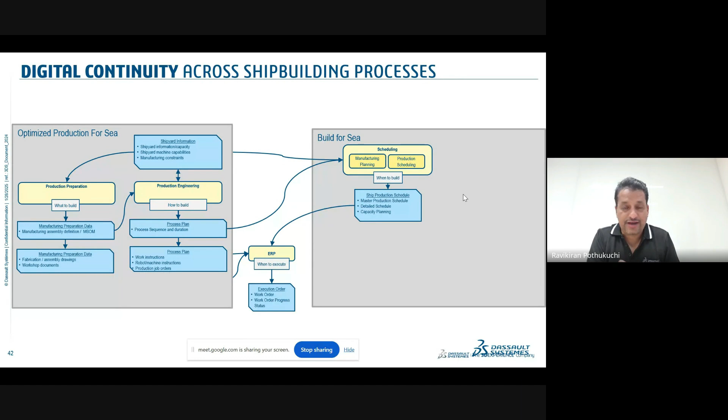The nuances of it may vary a little bit from aerospace, but the principles remain the same. There also you can validate your process - it is a fabrication process. Here also you can validate your assembly, which is also called erection. There are two steps here: assembly at a panel level and erection at a block level.

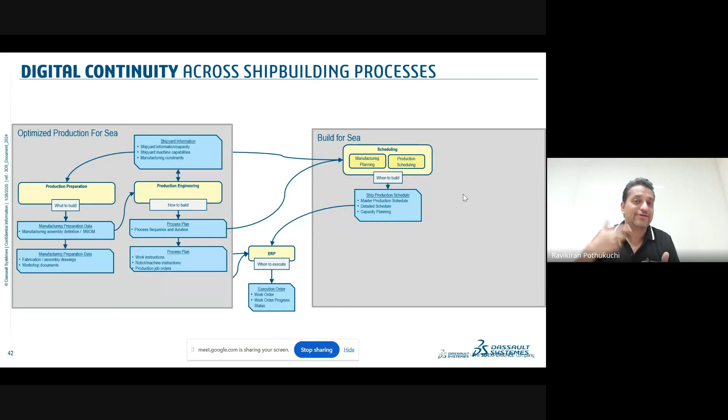So the complexity in shipbuilding increases multifold as against the aerospace industry. There it is riveting, here it is welding. So there is some additional capability in validating the weld quality and all of that. But otherwise the nuances remain the same, so I'll not spend much time on those aspects.

So there are two ways to look at it. As you can see here, production engineering, and then create your structure. Shipbuilding is broken down into two key disciplines. One is your steel, which is also called structure, because shipbuilding is predominantly a steel entity.

Then your bought-out items - your pipes, your accommodation, your HVAC, all of that - that is called outfitting. So there are two dedicated ways of producing these things.

One is your structure preparation. This is where you create a steel plate, how you cut it, what kind of holes you have to create - manholes and all of that, openings - and then stiffening. You have to put the stiffener so that there is no buckling of these plates, because you're talking about 10 by 10 long plates. Without stiffening, they tend to buckle, they tend to sag a little bit. So how do you do that and where to put that?

Those are all - you can see this is what structure. Let me put a pointer here. The structure production preparation is where you talk about where you are stiffening, where do you put a certain stiffener. So this creates a lot of drawings, and through this technology you can create drawings, and these drawings become handy information for the shop floor team, so that they know, okay, this particular plate I have to cut like this, there's the NC program I have to use, and these are the stiffeners I have to weld.

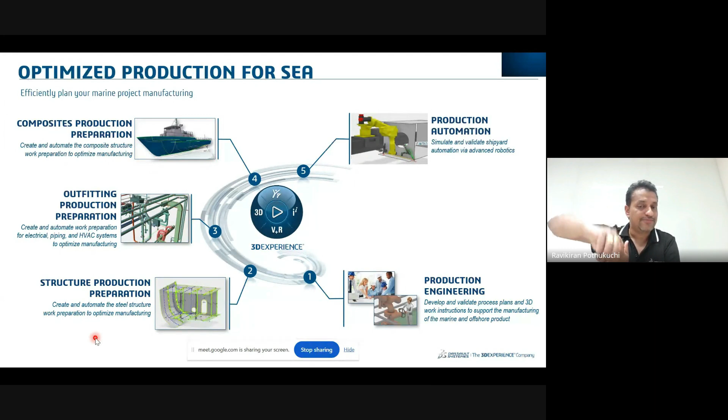The stiffeners have various types - there is an I section, there is a bulb section, there are so many sections, and all those calculations are done at the design stage, the structural integrity calculations. So here we are not talking about design calculations. Once design is done, it's just giving that information on a paper or a 3D model, so that people can refer to what part or stiffener goes to which plate.

Same thing extending to outfitting. Outfitting is about putting your pipes, your HVAC systems, your electrical harnesses. Just to give you a statistic - one ship has almost 100 kilometers length of electric cables.

Where will I run my electric cables? And they should not interfere with piping, because they should not interfere with my communication cables - because if there is any short circuit, my communication may go bad. If there is any leakage of the pipes - so there are so many rules that are built into this, so that you are ensuring that they are well designed.

But again, this is all part of the design activity. Once the design is done, translating that into a manufacturing process creation methodology is what we carry out here. So very similar to what we have been doing - entire process planning, sequencing of operations, and how each operation can be validated in the virtual world. That's what we do here.

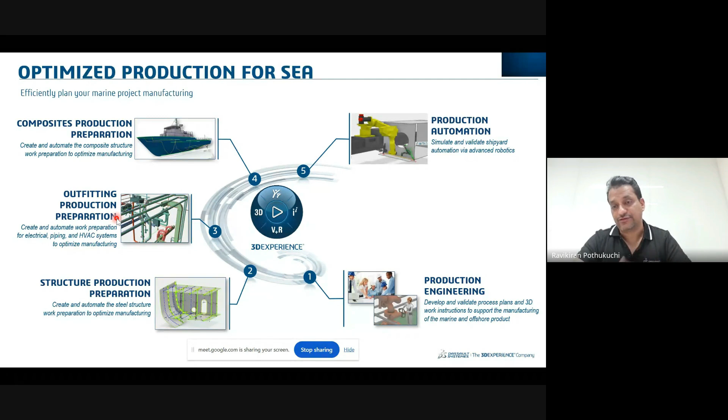Shipyard layout and simulation has benefited shipyards more than aircraft shop floors, because aircraft shop floors are already well organized, so they may only get incremental value. But in shipyards, the layout is often haphazard. With 3D validation and simulation techniques, they can make the plant look more appealing and attractive for newcomers joining the job, and secondly, a lot of efficiencies can be built in.

Once you have that layout, the same applies to production scheduling. Once you have the ERP system and get the order, you distribute it across various machines. You reserve berths, cranes, and gantry cranes because you have to carry out erection activity. In shipyards especially, there are critical resources like the dock, which once occupied cannot be given to another ship, and the gantry crane. Planning and scheduling these critical resources so they can be shared across multiple ship projects is the essence of production scheduling and optimization.

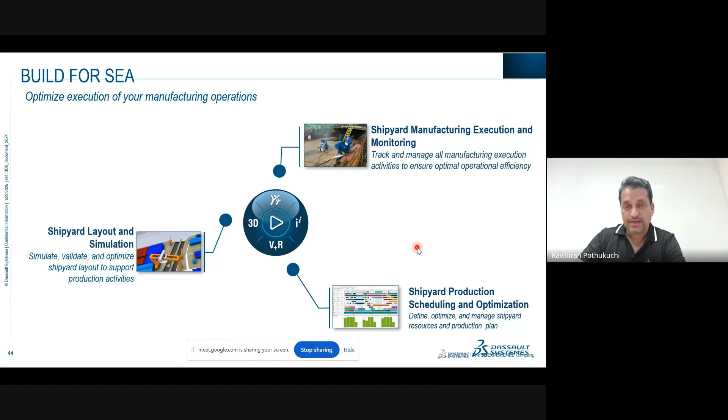That's the quick summary. I have a lot of other slides, but I won't jump into all of those. That brings us to 10 minutes before the scheduled end of our session. I'll keep this 10 minutes for questions and answers. I'll be happy to take those questions. Otherwise, I'll hand it over to Srihari.

Any questions, participants? Yes, please. My name is G.S. Reddy. I have three small quick questions.

Number one: single crystals are used for turbine blades, produced by GE some 40 years ago. Even in India, HAL Koraput did a pilot plant scale some 20-30 years ago. So my question is, why are these not replacing the existing directional DS blades or equiaxed blades, since they would extend the life of the engine? Why aren't they replacing them? What are the constraints?

I must admit I may not be a subject matter expert on that particular topic, because it requires expertise in turbine blade or engine blade design and the materials used. But it's a very good question. If you can send a mail, I'll reach out to HAL themselves and ask why they're phasing out crystal-based turbine blade creation and going with other approaches. My subject matter expertise is in bringing digital technologies to enable physical activities.